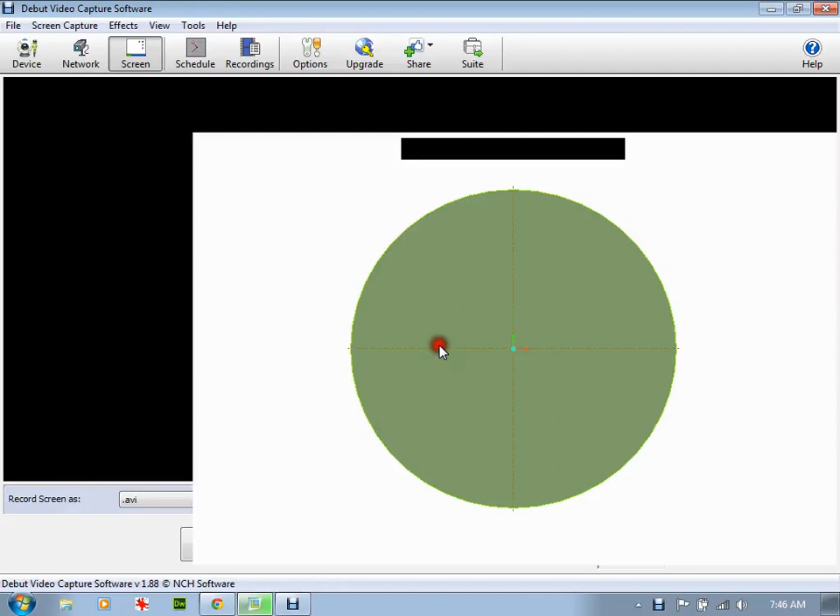This is a very short tutorial on how to make a pattern around an axis. I'm going to start by using a simple wheel here. So there's my wheel, and let me just go flat on here from the front. I'm going to make a pattern that goes all the way around, basically spokes.

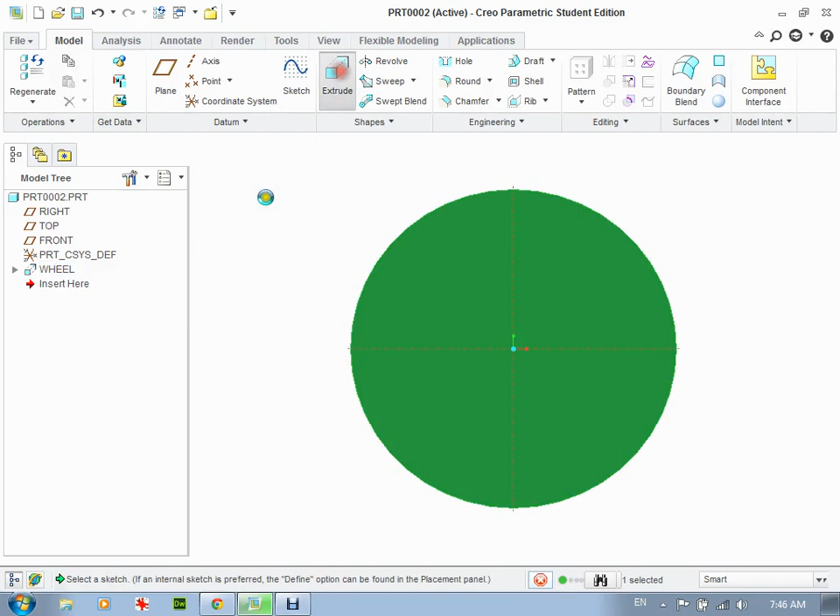So I'm going to take the surface, click on it, because that's the one I'm going to extrude on. Click on extrude. And I'm going to draw a very simple pattern, just half of a triangle. And there's my half a triangle.

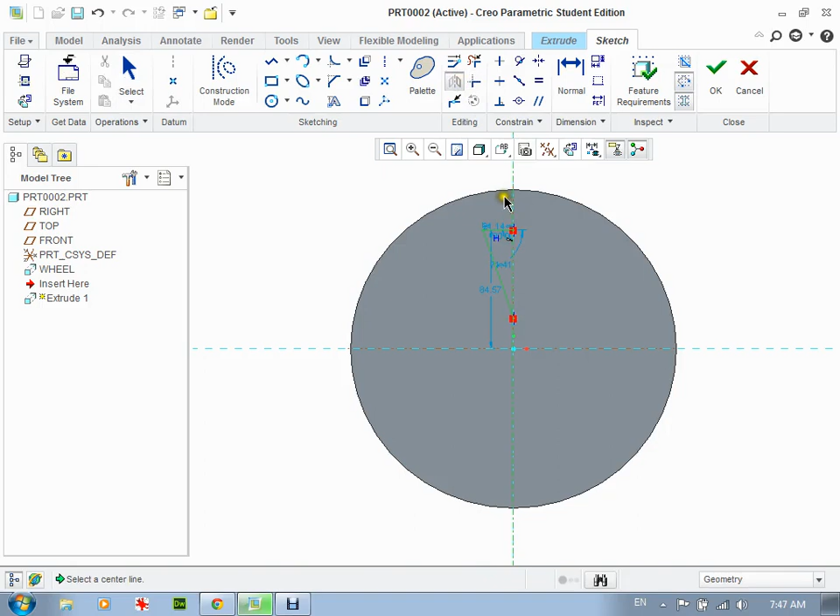Now what I'm going to do is mirror it to the other side, so you're actually getting two tutorials in one. I'm going to put a center line in here, which is right here, and there's my center line. I'm going to highlight the part that I'm going to mirror across the center line, and click on mirror right here.

And then I just click on the center line, and there it is. So there's my object now done. Now what I'm going to do is reverse the material direction and then remove the material. There's my part, or my spoke, I guess you'd say. I'm just going to rename it to spoke right away — get into the habit of naming each part.

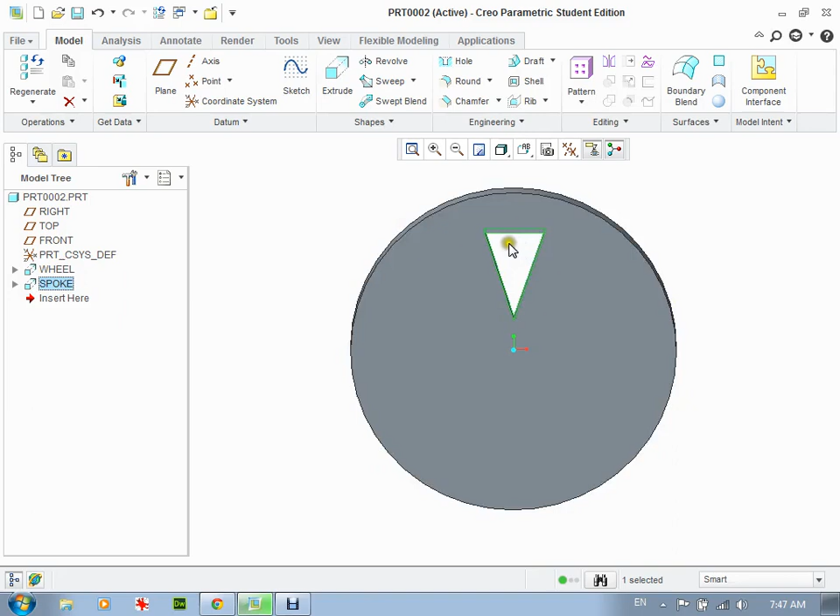Now that I've got it highlighted over here in the model tree, I'm going to hit pattern. Because this is going to go around an axis, you can see right in here there's an axis right there. So I'm going to click up here where it says dimension, go to axis, select it, and now you can see the 4 dots show up. I'm just going to make this flat again.

Now I have choices — do I only want 4 spokes? Do I want 6 spokes? I'm going to change this to 6. Watch what happens: 6 times 90 is 540, so it actually goes on top of itself. So I've got to change that 90 to 60, because 6 times 60 is 360. And now I have my 6 dots.

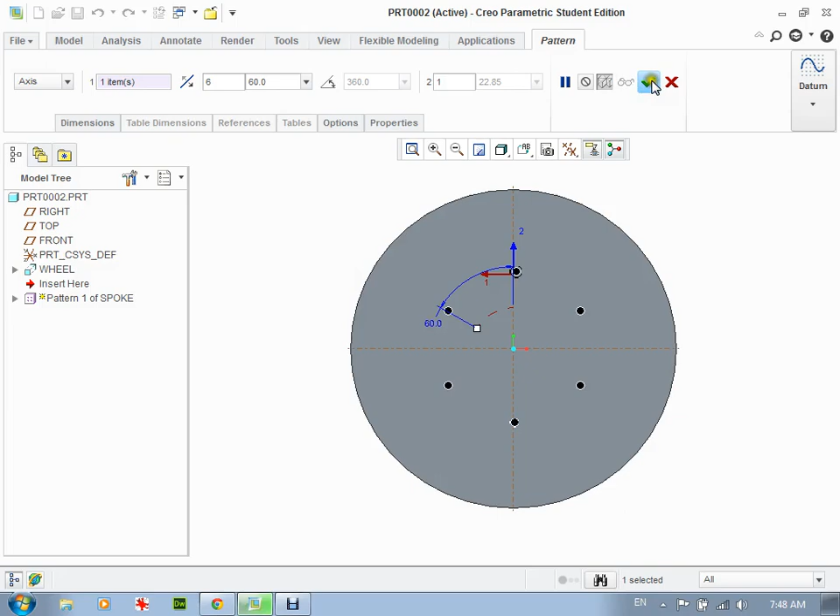Okay, now I can just take the... no, I can't. I'm just going to hit the check mark. And basically, there are my spokes done.

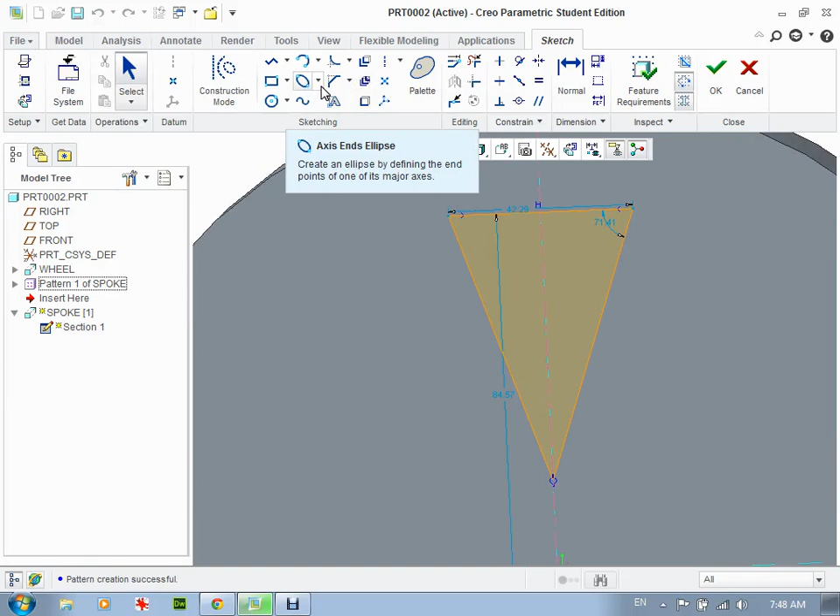That's pretty simple. Now what I can do is go back into this pattern, take the first spoke, and edit definition. At any time I can go back into this, and let's say I want to round it a bit better. I can come up here and basically do some different things or modify it. So let's take some lines out of this and do something else really quickly.

So I can take that line there, and you go, oh, that's kind of dumb. But what I can do is just delete the segments — delete this, delete this, delete this. Whoops, wrong one, too far. Let me go back to that and delete segment. Okay, so let me delete that one and that one.

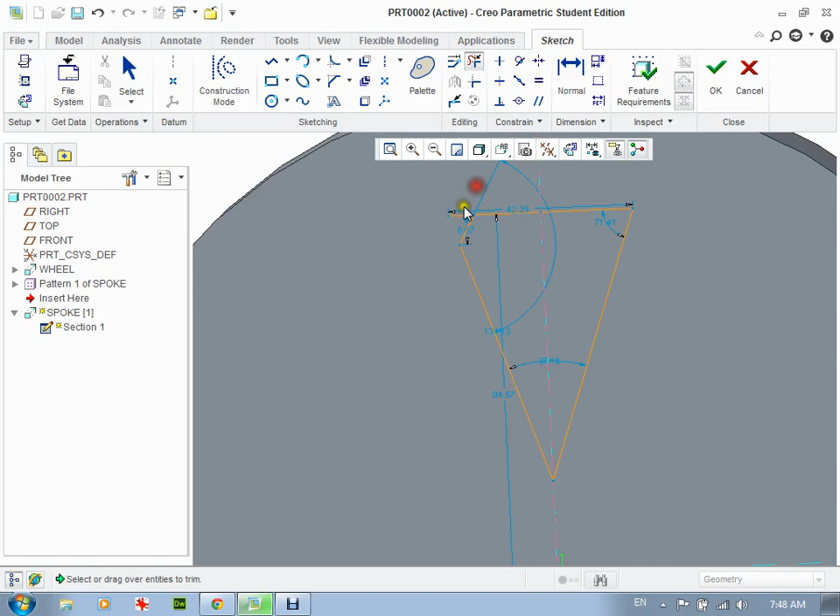Now I want that over there, so I could redraw it, or I'm just going to delete these 2 segments, go back, highlight them, and mirror across the center line. Now it's back — hit OK, and you're going to see that it automatically takes effect on all the other surfaces.

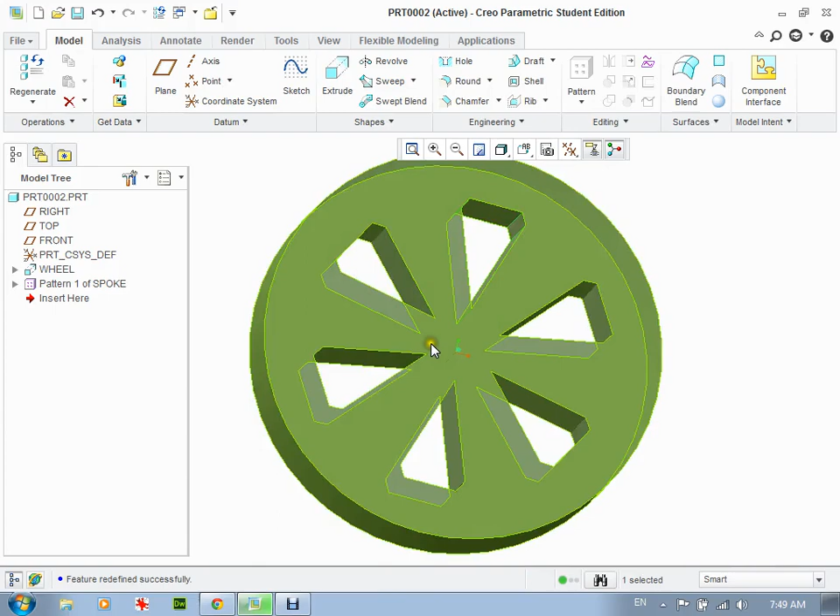So you can always go back and modify the entire thing, round things over, whichever — just another little bit of information to help you along the way. So I'm going to end right there, but that's basically how to revolve or make a pattern around an axis. Thank you.